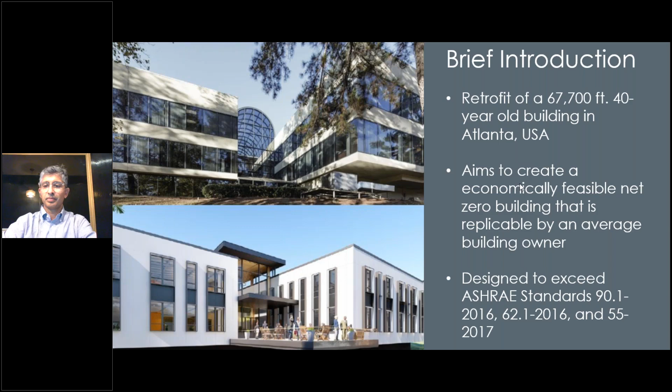Talking more about this project today is Shreshth Nagpal, expert speaker for today. He's joining us from New York, it's 9 a.m. for him over there. He is a principal at the Integral Group that is providing engineering design and analytic services for this project. Shreshth's professional focus over the past 15 years has been to understand and model building performance that results from the interaction between envelope configuration, climate context, functional requirements, conditioning systems, and occupant behavior. More recently, his doctoral research focused on developing automated workflows to construct living urban energy models that are designed to systematically explore future energy scenarios and identify areas of maximum potential savings. Shreshth especially enjoys working on projects with a focus on designing with passive strategies for thermal and visual comfort, and has completed specialized building physics analysis to help inform design decisions of several award-winning projects that represent a broad spectrum of type, scale, climate, and performance goals. I welcome you, Shreshth, to the webinar today.

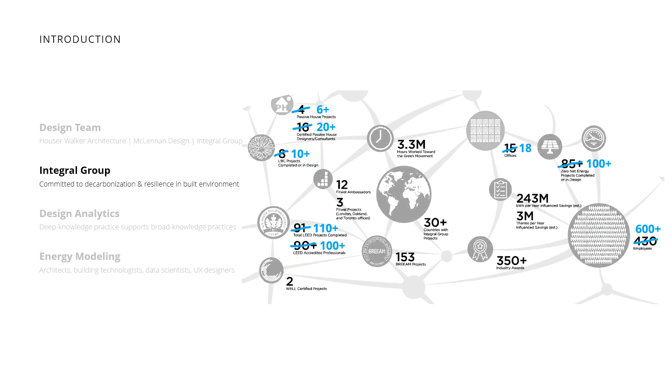Within that firm, the practice that I represent is called Design Analytics. We are based out of New York, and the whole point of this practice is we are a group of specialized individuals with deep knowledge. The idea is to support all practices across the company, across the world - what we call broad knowledge practices like engineering, policy, or health and wellness. The idea is, if any quantified decisions need to be made, or if any design decisions need to be informed by analysis, that's the job that we do.

Which brings us to talk about the project a little bit, now that you know me and who I represent. This is ASHRAE. They needed to move out of their current place and look for a new headquarters. They purchased an existing mid-century building built in the 1970s, about 67,000 square feet, near Atlanta, Georgia, where their current headquarters is as well.

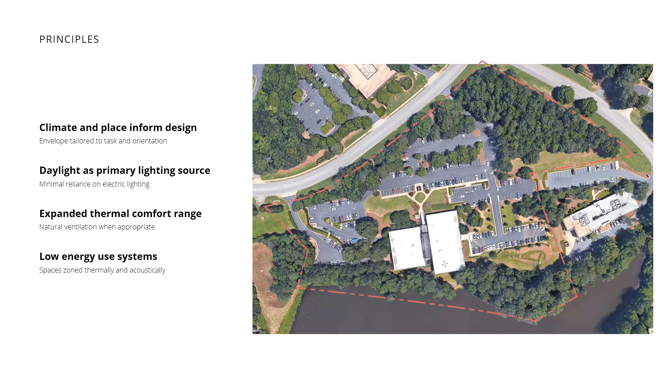We want to use natural ventilation, we want to use an expanded comfort range, and then follow it with low energy systems. Whatever loads, whatever comfort criteria we cannot meet entirely by passive strategies, we wanted to make sure we are using the right systems, the most efficient systems, controlled in the most optimal way to provide for occupant comfort.

The first thing we do, as anybody does when trying to design a net zero energy building, is establish for ourselves exactly where we are starting from. ASHRAE had set very stringent targets for what the lighting power would be in the building, and what the equipment or plug load power would be, and we found that if you were starting right from scratch—if this was any other building where the owner wasn't cognizant about reducing their own operating, functional, or programmatic loads—the building would be somewhere around 36 kBTU per square foot per year energy use intensity.

But because ASHRAE was itself a motivated client, they knew what they were doing and had set programmatic targets for themselves. They were already at a significantly better starting point. If they just moved into this building and updated it to minimum ASHRAE requirements, making sure the lighting power densities and equipment power densities matched the project requirements they set for themselves, they would be at about a 30 EUI.

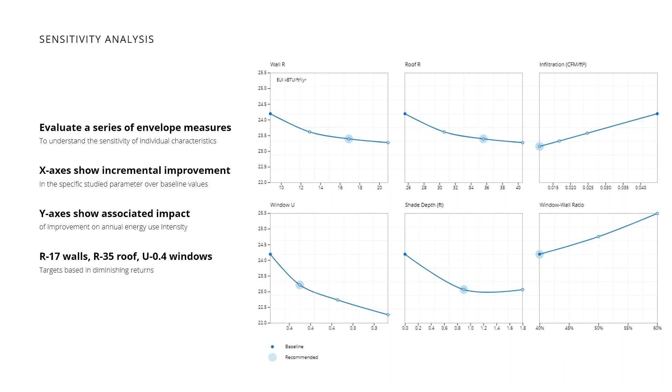Now the question is we need to be able to design to these values, but as a starting point, if we can achieve these performance parameters through our construction, detailing, and design, we should be performing okay from an envelope perspective.

The next step is supposed to be interactive, but since this is a static presentation, many of you would have seen a chart like this before. Essentially, this is a parallel coordinates graph, which takes a step further from the previous sensitivity analysis.

We prepare this for architects, engineers, and ourselves as a decision-making process. All the vertical axes on the left, except the rightmost, represent the same envelope parameters evaluated earlier. The rightmost axis is the energy use intensity that results from any combination of these parameters, which you can pick and choose in this interactive graph.

So the idea is, if you want to compromise on a certain parameter or make it more aggressive, you can fix it and see the impact of choosing another value for another parameter. This helps you understand what might go wrong or what might result in maximum savings from a slight improvement or degradation in a specific parameter.

Another cool part we started doing recently—anybody who's done energy modeling knows that setting up hundreds of thousands, or at least tens of thousands, of runs to model every permutation and combination, while possible, isn't the most fun thing to do past a certain point.

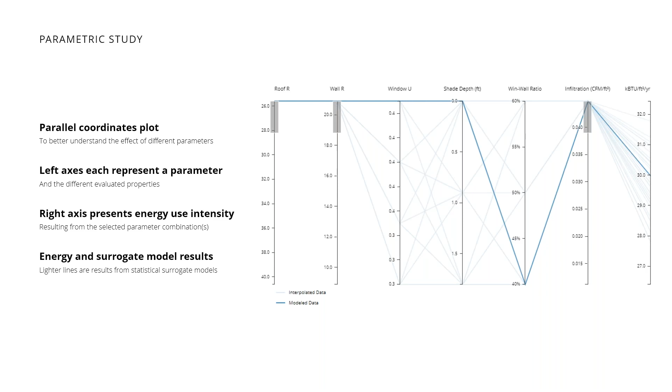The next thing that follows is essentially the real baseline we set for ourselves before diving deeper into the design strategies. This shows your starting point on the extreme left.

I should mention this is going to be an all-electric project, and many of you have probably started experiencing that this has become a standard part of conversations now. The future is all-electric, because the only way to achieve carbon neutrality or eliminate fossil fuel usage on site is if you're not consuming any fossil fuel. Now, cost is still a completely different argument altogether.

Here in the US, where natural gas is much cheaper than electricity in most regions, any client or design team who knows they're designing for the future is cognizant of the fact that they have to start eliminating fossil fuel usage.

What you see on the extreme left of this graphic is the total energy use intensity, which is all electric, that the project will consume. At the end of the last section, based on just ASHRAE requirements, we were at about 30 EUI. We did that analysis trying to find the optimal envelope, and if you use recommended envelope properties, that EUI drops down to about 25, which is all electric. The critical thing here is to understand where that 25 EUI of energy is flowing.

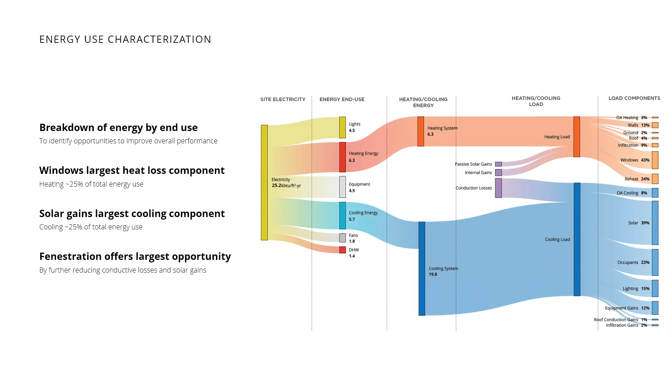So as I explained, we moved from 36, which could have been a standard project starting point, to 30, where ASHRAE and the client itself—kudos to the client who knew what they were doing—brought it down to 30. Then a simple early-stage energy analysis, an energy model that recommends the optimal construction value, brings it down to 25. The chart is very long horizontally, so there's a long way to go, but we're very close to the target ASHRAE set for themselves here at 25, and we need to hit 21.4.

So far it looks easy, so we should get there soon enough. But this is in fact where the design process actually starts. All of this is just a preamble to even sitting down at the drawing board. All of this work is completed to understand what we are up against, what we are dealing with.

Now we can start thinking about design strategies, understand the context, climate and place, to see what else can be done. Which brings us to the first design stage process: to understand what the climate, context, and site for the project are. The massing, unfortunately for us since it's an existing building, is pretty much fixed. What we can still do is make sure different orientations and envelope portions respond reasonably to orientation, solar geometry, solar impact, and incident radiation.

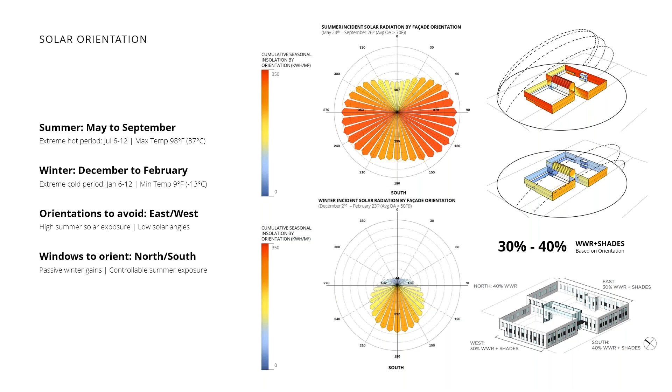Based on the climate and solar radiation analysis, the window to wall ratio should not be more than 30 to 40%. Restrict to 30% on east and west, and restrict yourself to 40% on north and south. This is simply based on solar orientation.

The next thing is to start looking at psychrometric data. The charts you're seeing on the screen are not just plots of outside air conditions as we typically start with. These are indoor operative temperatures that result from an energy model we've already built for the project.

This shows natural ventilation potential - how many hours in the year can be brought under comfort conditions, depending on how you define comfort criteria and how effective your natural ventilation design is. The key strategies: what if you only open windows for natural ventilation during the daytime? Then, what if you rely on night purge to charge your thermal mass at night so the radiant field changes and people are more comfortable during the early hours of occupancy?

So if there was no natural ventilation - that's the top left chart - the number of hours falling within the comfort range, these indoor operative temperatures accounting for internal heat gains, envelope losses, operating hours and everything else, would be less than 20% comfortable if unconditioned and not naturally ventilated. As you make natural ventilation strategies more effective incrementally, the comfortable hours increase from 20 to 30 to 40 to almost 56%. That's a significant number of hours you can be comfortable without relying on active systems.

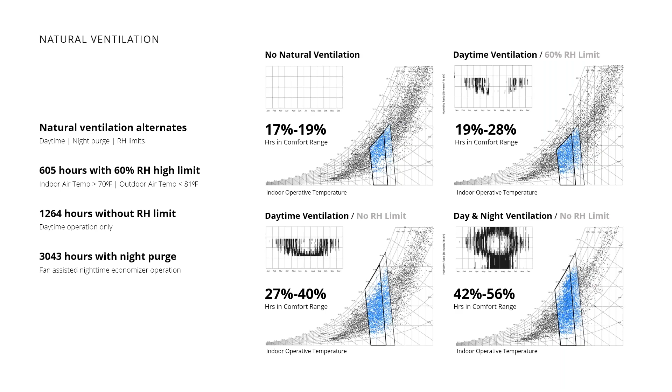This is an important part of climate analysis because it tells you it's really important to design for natural ventilation in this climate. Now, how you design for it is a different ballgame altogether - you want enough inlet area, outlet area, cross ventilation opportunities, and internal layouts that aren't obstructing. The idea is there's enough potential to reduce your energy use if you design a natural ventilation scheme really well.

Finally, as part of climate analysis and understanding the context, you look at the renewable energy potential, following the solar radiation study I presented earlier. Because this is supposed to be an efficient building, we don't want to let it consume whatever it consumes and then just fill the site with photovoltaic modules. The idea was to understand how much the roof itself can generate, so it becomes a true net zero building - so that within our building footprint, whatever we consume, we can offset.

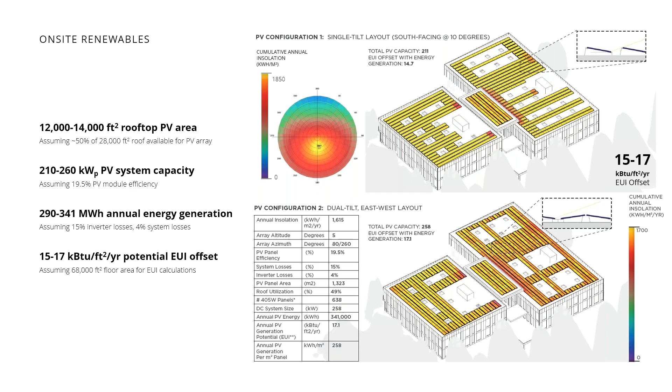Based on the optimal orientation and what we thought the mechanical equipment or skylights to improve daylight would take up on the roof, the remaining area, based on our initial calculations, can offset anywhere between 15 to 17 kBTU per square foot per year. So we know that if this needs to be a true net zero energy building, we can only offset about 17 kBTU per square foot per year from the roof area. So the previous target the clients set at 24.1 is no longer valid - if we're designing a true net zero building, the net zero energy target reduces to about 17.

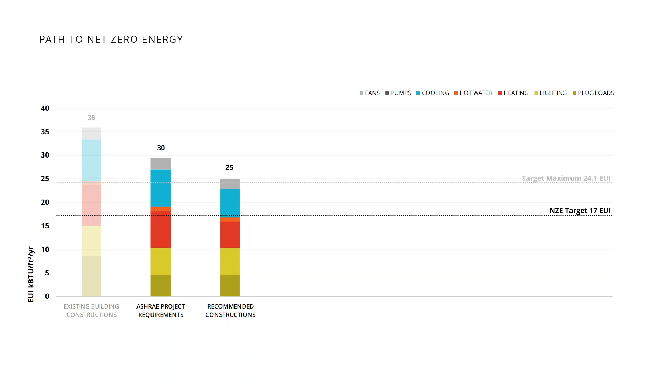So the first thing that does is start looking at the program. What is the building going to be used for? What are the different spaces supposed to be? What are the requirements of all of these spaces? So starting to work with the architects and the interior layout of the space.

So this is an office building, the global headquarters for ASHRAE, which basically means it's predominantly an office space, but there are some event spaces because they expect industry people and members to show up for events. And then there are conference rooms and all the other regular things you would expect in a space like this.

Now, there are several different ways in which the spaces can be organized. The three massing or layout organizations you see on screen are named mixed, stratified, and stacked. The idea was, if you laid out the different spaces scattered over the entire floor plate, it gives a good inter-department workflow, because if you want to go to a conference room, you just step out of your office and you have one right there.

The second one is slightly different because it combines all spaces with similar requirements, thermal perspective or daylight perspective, together. The third one was slightly different, but it was actually eliminated very early on in the design process.

But if you just look at A and B, the idea is scheme B allows us to condition the spaces more optimally, because all spaces that can have an expanded comfort criteria are together, and spaces with strict conditioning criteria can be together, meaning they can be more efficiently served by the HVAC systems. Similarly, spaces with similar daylight requirements are clubbed together where they have those daylight qualities.

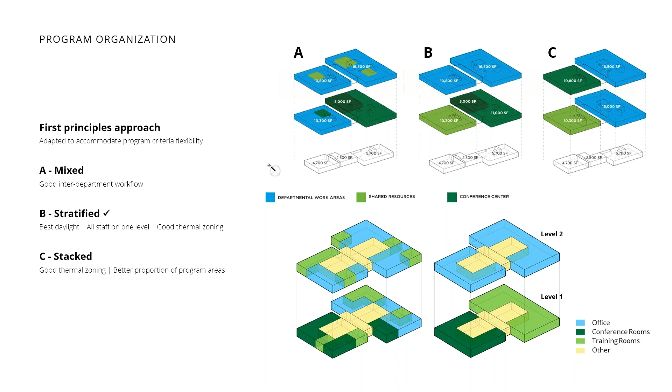The second thing was the atrium. If you remember the building image I showed earlier, there's a huge atrium right in the center, completely glazed, completely not designed for energy efficiency. It was a greenhouse—in fact I read in the design team narrative that it's an example of exactly what not to do. The idea was to change this atrium with an opaque roof so that it stops being a greenhouse, and design it with enough shading and solar control so that it can become an interstitial space.

It can become a totally passively tempered space, a transition between the two building blocks, but you stop conditioning it, heating it, or cooling it anymore.

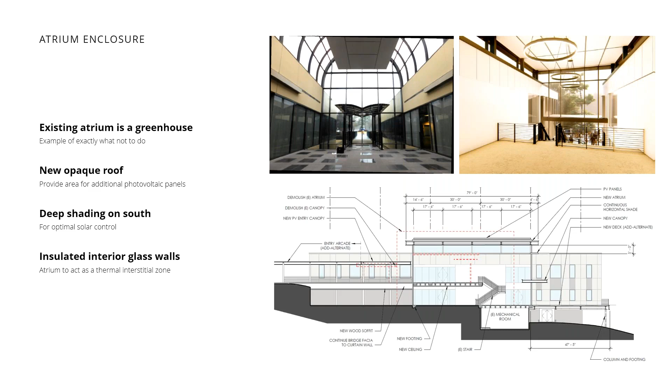And then, of course, the whole notion of expanded comfort range. As designers, we are very aware that perceived thermal comfort results from several factors—air movement around you, with ceiling fans, or the radiant field around you, because that affects your operative temperature. So the idea, again in Fahrenheit, is that a thermostat set point of 75 degrees, perceived in a mixed air space without radiant systems and with still air conditions, almost translates to very high temperatures if your air movement and radiant field are optimized for.

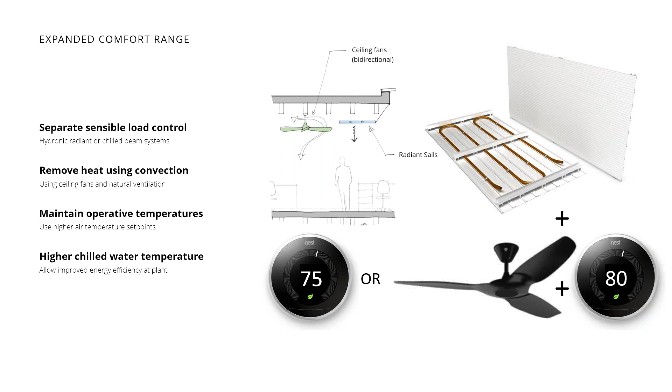You'll see the sketch again as it shows up in the coming slides. But the idea is, with all of these things—making sure our program layout is done correctly and the comfort criteria is defined correctly—we reduced our EUI by another 3 units, and we are close to 22 EUI.

So that brings us to a point where we've looked at construction, program organization, and comfort criteria. Which brings us next to sometimes the most critical aspect of a project: further details beyond constructions, what we want to do to the envelope. We've already defined for ourselves what the different window-to-wall ratios should be, what the different shading configurations should be. The design team spent a lot of time drawing out what the different configurations could be to achieve those window-to-wall ratios.

One thing that is very important to understand: these are punched openings, and they're going to significantly reduce the window to wall ratio of what the project already had, which was about 70-75%. The idea was, because this was to be a demonstrable, replicable process, it had to come under budget and be feasible.

The design team was always trying to make sure the new windows can fit within the existing precast panel configuration. The idea was not to rip out the entire facade and start over, but to do minimal interventions so that it's cheap, inexpensive, and easily done.

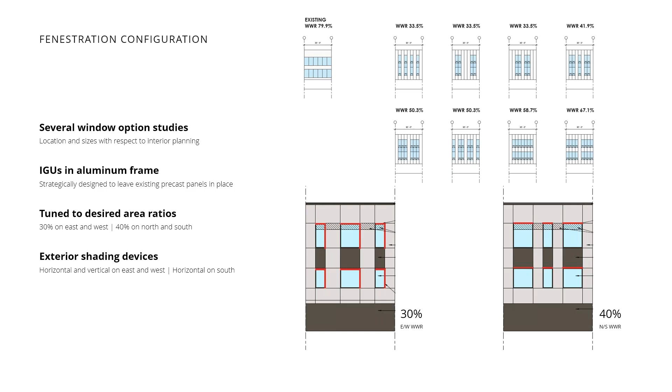It's not that we consolidated the entire 30% together - we distributed it to make sure daylight distribution within the spaces was fine.

The next thing, talking about daylight, was the skylights. I mentioned earlier we have relatively deep floor plates, so it was not easy to allow daylight penetration deeper into the floor plates just with perimeter windows. We started talking about how to punch openings in the roof to ensure enough daylight everywhere there are workstations.

The workstations will have drop ceilings, because that's where we plan to have radiant panels to improve thermal comfort. In any case, skylights right above workstations could potentially result in glare and visual discomfort or overly bright situations.

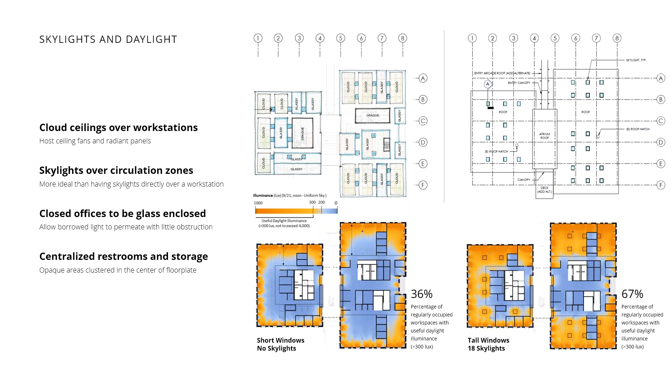We are going to stick with the right scheme because it also meets the minimum criteria we set. But studies like these help inform that on the face of it, it's the same thickness and material of insulation, but because of thermal bridges and increased heat loss or gain where the slab meets the edge, if the insulation isn't continuous, you can seriously degrade the overall performance of the assembly.

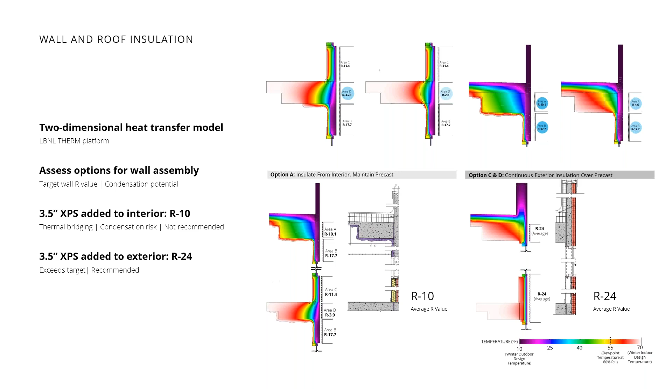So with more thermal analysis, and finally with all of this envelope configuration - the window design I showed you, the shades implemented where needed, and the wall insulation values we just discussed - we reduced our EUI to about 19.

The difference between the recommended construction target of 25 and this step is that was just the starting criteria of what we wanted to achieve. This is now based on actual design details - this is what we know we are going to do.

And then I think at this point we wanted to take a break, and I'll let Deepa decide what we wanted to do.

Thank you, Shreshth. That was very interesting and very clear in how you went about the design process and all the different analysis. You would have done so much work, and condensing everything back into a few slides is really challenging. So I think we should have a little quiz right now, just to reinforce if everybody understood what has been covered so far, and to have some interaction with the attendees.

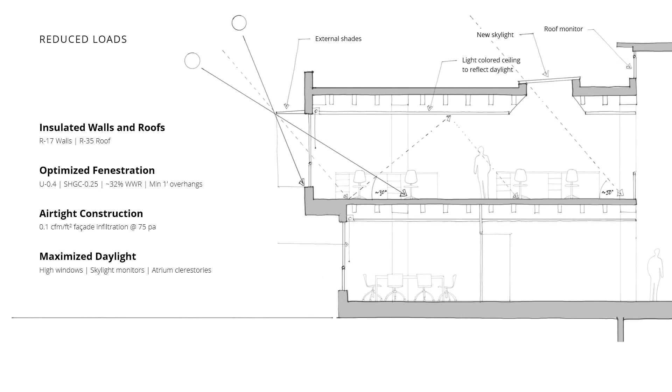Next is to start thinking about what's the optimal way to condition these spaces. I mentioned this briefly when talking about extended comfort range. We knew people are a lot more comfortable when there is sufficient air movement around. The convection coefficient against your skin changes completely and enhances your comfort perception. So we knew ceiling fans are going to play a big role.

That's the starting point, and this can work very well with natural ventilation. So we know we are going to design a mixed mode system with operable windows and natural ventilation, and we started looking at whether that atrium you saw earlier can become part of the natural ventilation strategy, where it can induce stack or buoyancy and be the outlet of the natural ventilation scheme.

We also spoke about night flush earlier. We knew that if we charge this building's thermal mass at night, it helps significantly increase the hours people will be comfortable. Sometimes that can be done completely passively, but even if it cannot, because there's not enough wind or pressure differential, we knew we were going to use our air handlers, the dedicated outside air systems, to night flush this building and charge the thermal mass.

From a systems perspective, energy recovery was a no-brainer. We were going to make sure we are not losing any ounce of energy through exhaust air. And then, wherever we needed overhead versus displacement ventilation, based on the program and where we can achieve stratification, we were going to distribute our air systems accordingly.

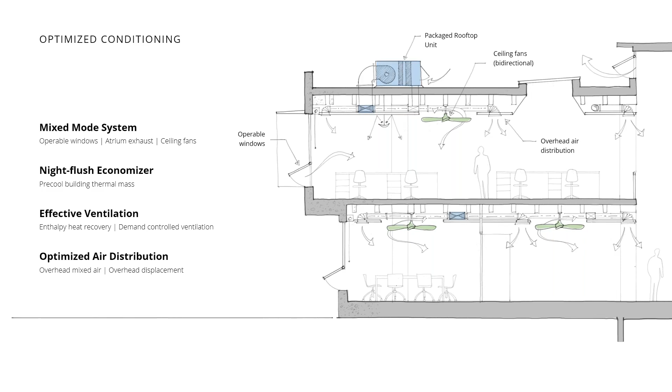The next step is, now that we've figured out what we want to do with air, how are we picking up the loads? That's where you get into decoupled systems. Now we want to completely independently isolate the sensible loads from the ventilation requirement, because that's the most effective way of doing it. We also spoke about the radiant field around people.

So we're not just relying on air systems to meet comfort. We want to supply as little air as needed from a pressure perspective. And I should mention this is ASHRAE, so they're designing everything to 30% higher outside air rates than standard 62 requires. So all that outside air we need, we design for, but from a sensible load and comfort perspective, we want to deliver that from hydronic systems or hydronic terminal units such as chilled beams or radiant ceiling panels or radiant stairs.

So that starts making you think about two separate systems. One is the DOAS, or dedicated outside air system, that takes care of energy recovery from exhaust and meeting ventilation and occupant health requirements. Then a completely different hydronic terminal unit system sends cold or warm water so that the radiant field changes and achieves comfort with minimal reliance on energy-using systems. This also brings in a whole new plant equation, because now you need a plant that can generate chilled water and hot water, not just cool air from packaged systems as was possible earlier. This is going to be an all-electric building, so we're relying on heat pumps.

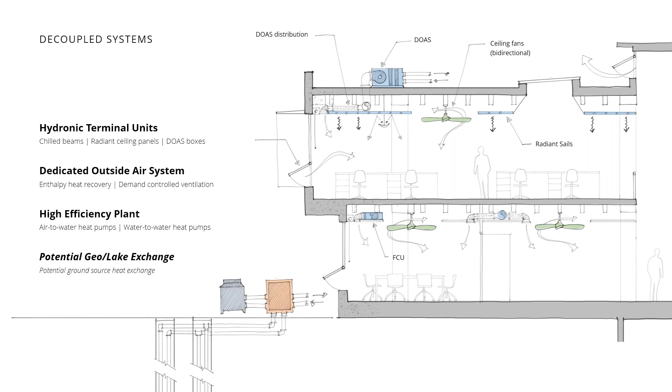So this is where we ended up. After the envelope configuration, we were at 19, slightly above the 17 target we needed to be. Based on the system, if we simply did an all-air system without any radiant panels, but just efficient air distribution, energy recovery, demand control ventilation, all the good things, we just about hit the target we wanted to hit for ourselves. If we move to decoupled systems or hydronic systems, we save another EUI, and we get in the territory where we can now start generating everything comfortably, I would say, from the roof that we think we will consume. So that's almost the entire story of the project design.

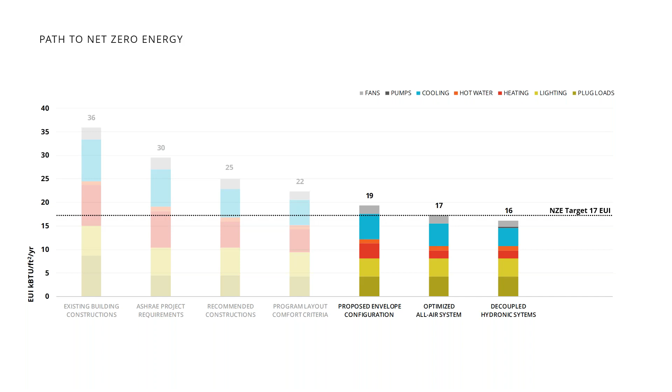At the very end, the only thing I would want to add is, because we always, as engineers and designers, want to keep a safety factor in everything we do, even though our analysis is suggesting that PV will generate 17 and we will offset 16, that still makes you queasy, that still makes you uncomfortable, because things can go wrong and PV might generate less and the building might consume more. So as a last effort, we wanted to make sure we've maximized our potential for generation.

We looked at certain other areas where we can include PV, maximize the efficiency of where the modules are oriented and how they are placed, because now we have a better skylight configuration. Now we have a better understanding of where the HVAC equipment will go on the roof. We consolidated it to one point so that we have more area available for renewable energy, and we increased our generation potential from what was 17 at the beginning, when we first did the climate analysis, to about 19 now.

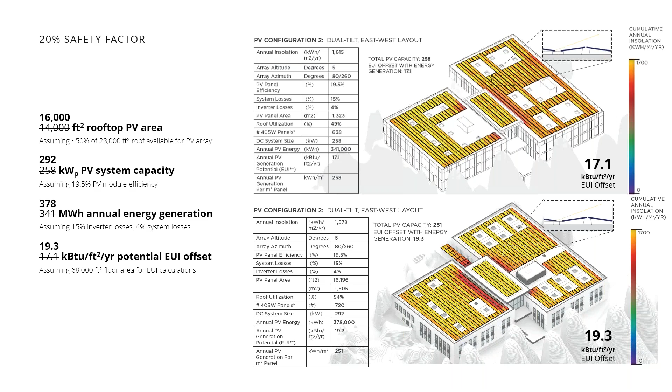So to wrap up this whole process, towards the very end, we basically designed a project which could have been 36 EUI down to about 16 EUI, and we want to make sure we have at least a 20% safety factor between what we are going to consume and what we are going to generate. So we increased our PV use to about 19 EUI. And that's where we are at right now.

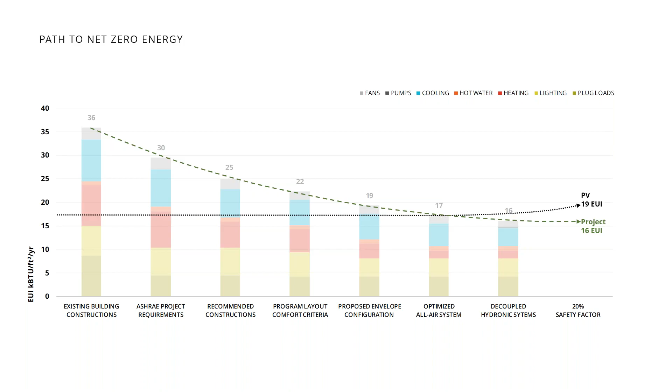I should mention the project is in construction documents. I think we are very close to wrapping up the CD. So this is what the final design of the project is. The project will get into construction administration phase very soon, and hopefully this is what the building that ends up getting designed will be. We will see how the performance is once it's done, but that's where we are.

I should clarify that this is not a very glamorous project, because it was never meant to be. This is not flashy. This is not a sales headquarters. This is the headquarters of ASHRAE, and it's a replicable project, meaning the interventions were left to be very minimal. The windows are punched and small. The atrium is done the way it's supposed to be, but nothing that did not need to be touched has been touched. And if the project can hit net zero with minimal cost investments, and if it can generate all the energy just from its roof that it consumes, and if it can achieve the comfort, both visual and thermal, that we've designed it to be, it'll be a super awesome story.